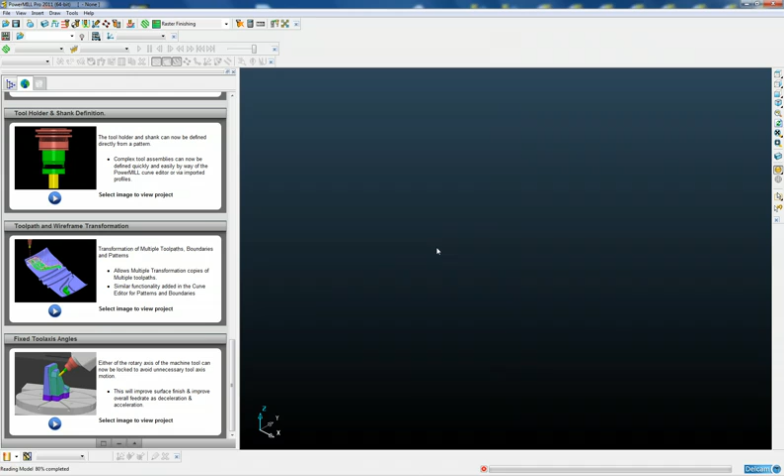Let's open an example project and take a look at some of these new toolpath transformation options. In this simple tread mould, we have two toolpaths, a roughing toolpath and a finishing toolpath. We're now going to mirror and transform this toolpath to give us the complete mould.

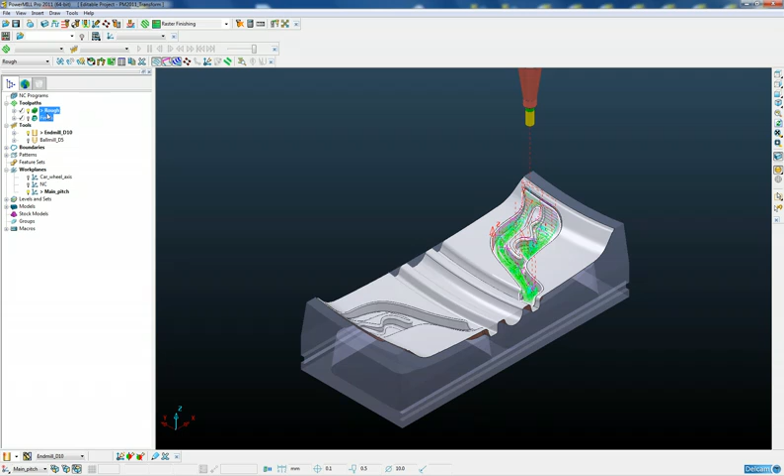So to do this, we need to select both of the toolpaths, right click on the toolpaths and say Edit, Transform. The new improved toolpath transformation toolbar pops up, and the first thing we need to do is mirror both the roughing and the finishing toolpath about the centre line of the tread mould to give us the opposite side.

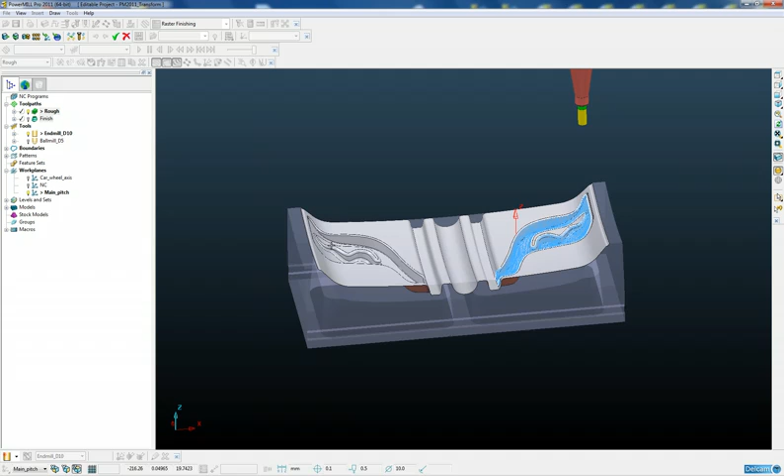You'll notice that the actual toolpaths on the screen have turned to a light blue colour. This is an indication to the user that these are the selected toolpaths that we are going to be doing the transformations on. So I'm going to switch on a work plane called NC, which is in the centre of our tread.

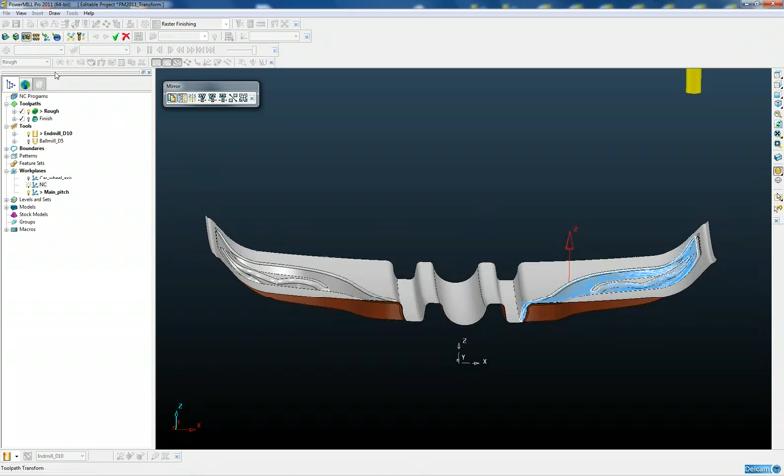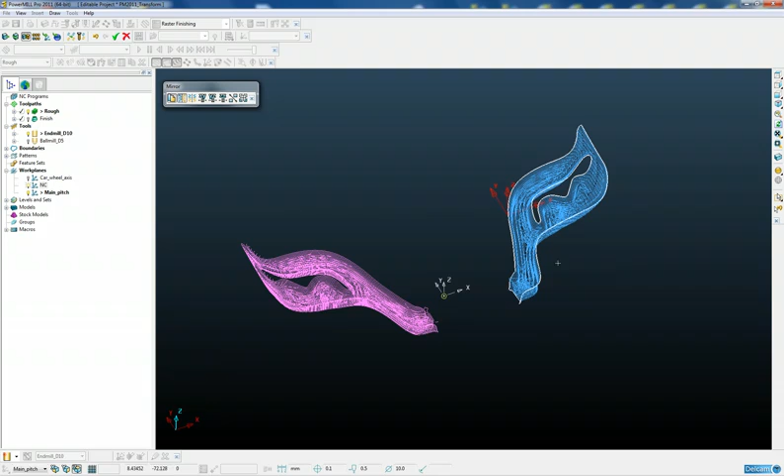And the first thing we're going to do is simply mirror the toolpaths about the centre line. So we're going to reposition our move origin, or our mirror origin, and snap it to the work plane, and we want to mirror around the ZY axis, so click on YZ. So there we can see the original toolpaths in blue and the mirrored copy, which is highlighted in pink.

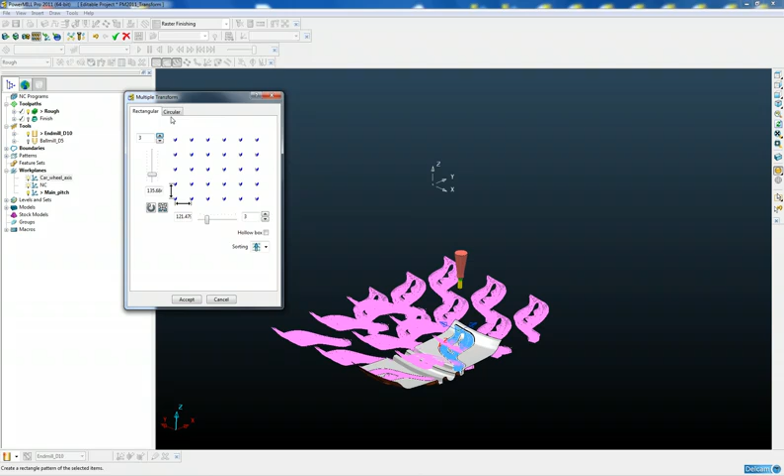The next thing we need to do is create multiple copies rotated about the centre of the wheel axis. So we have a work plane which is at the centre of the wheel. So to do this, we're going to use the new multiple transformation, and we can either create a rectangular array or a circular array. So let's look from above.

So here we can see a rectangular array, and we can just dynamically drag the distance, and we can increase the amount of copies we want in both X and Y. And if we want to, we can remove the centre, so we just have an outer profile.

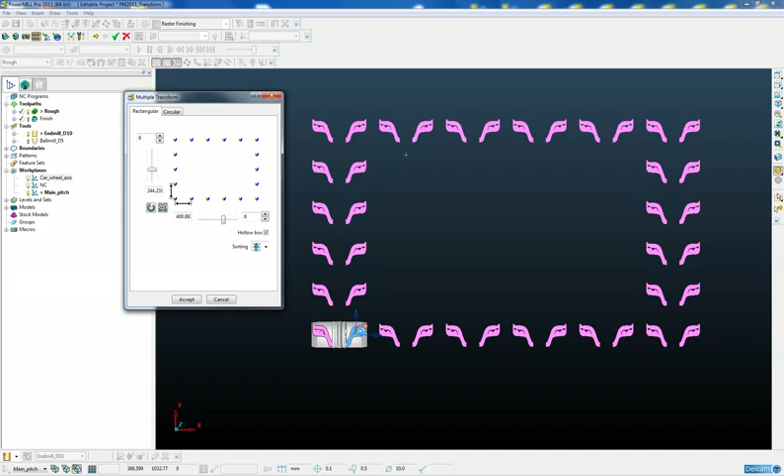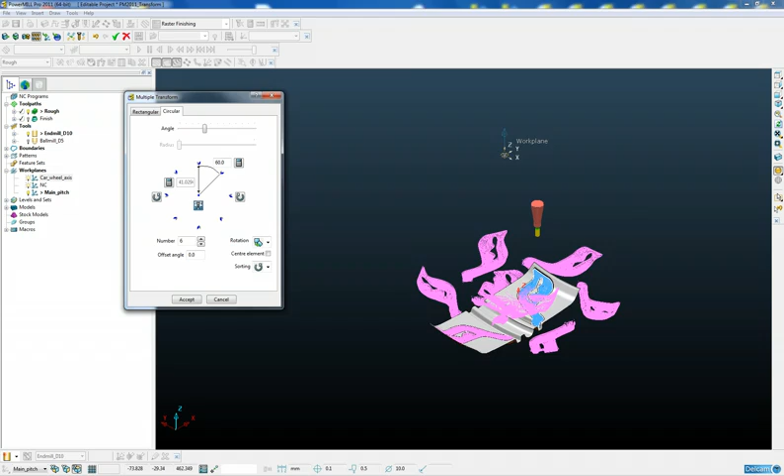For this example, we want to do a circular array, so we're going to swap to the circular tab and change to an isometric view. Now we want our circular array to be about the centre of our wheel axis, so we're going to pick up the anchor point and snap it to our work plane, and we want the centre of rotation to be around the Y axis, so we're going to change our working plane down here in the bottom left corner to the Y axis,

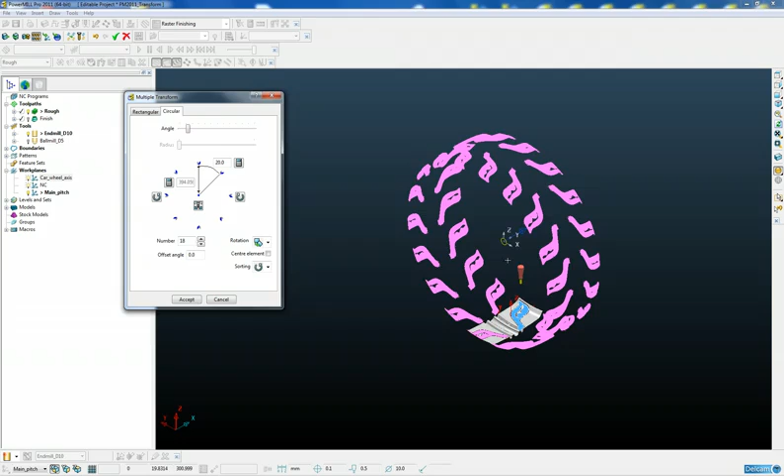X axis, and then we can specify the angle or the number of copies. So we have an angle of 20 degrees, which will give us 18 copies around the X axis. So we're going to accept that. At any point we can undo if we make a mistake, or redo.

And the final thing we need to do is specify how we want to order the toolpaths in the PowerMill Explorer down the left hand side. There are two options. We can keep the current ordering, so in this case it will be rough, finish, followed by rough, finish, etc. Or we can group the toolpaths based on the tool. So all the roughing will be grouped together, and then all the finishing will be grouped together. So we're going to group it based on tool change, and then accept the changes.

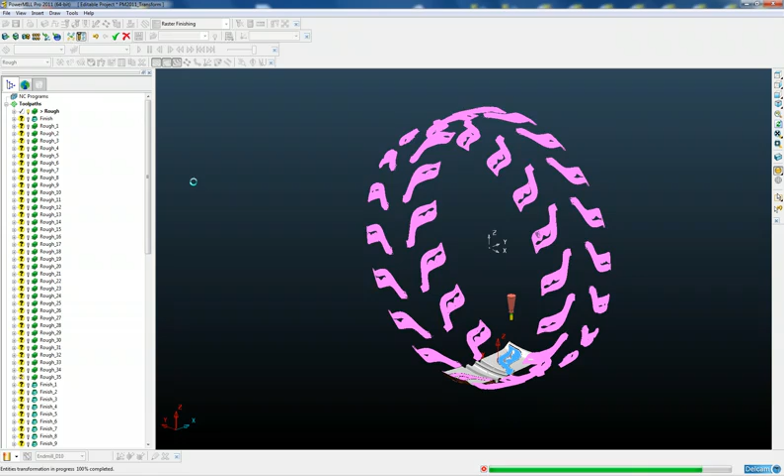And there you can see quickly and easily the roughing and finishing toolpaths are copied, mirrored, and then rotated around 18 times. So there you can see it is now very simple and very quick to do multiple transformations of toolpaths. This functionality is also available for the transformation of patterns and boundaries.